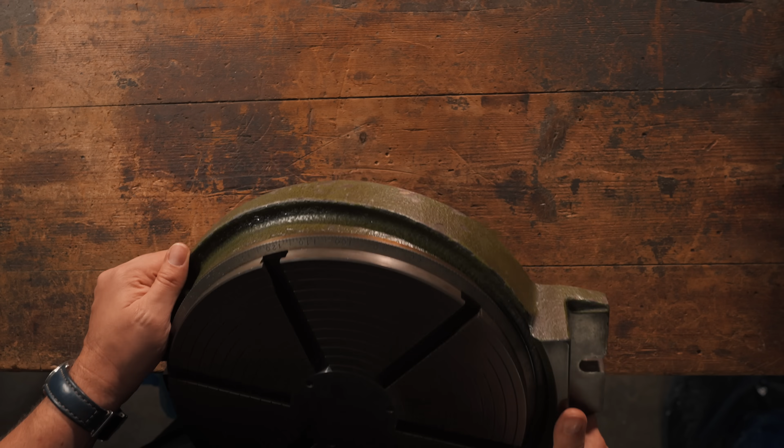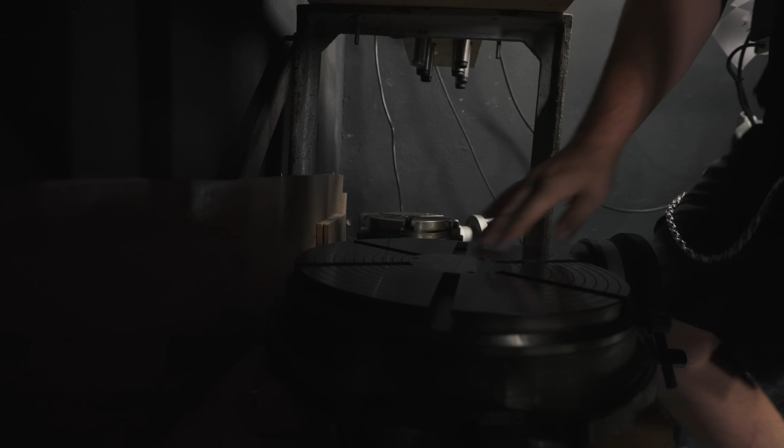This rotary table made its way from a scrapyard to my garage about 8 years ago. I cleaned it, fed it, gave it a nice home on a shelf, and I never used it once because I didn't have any convenient way to hold stuff on the damn thing.

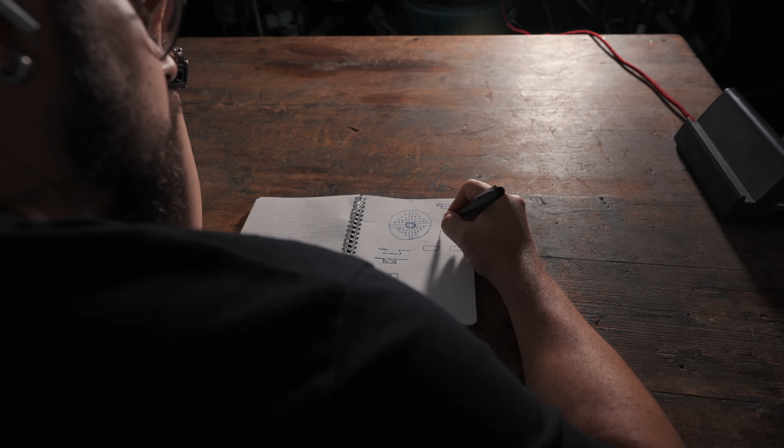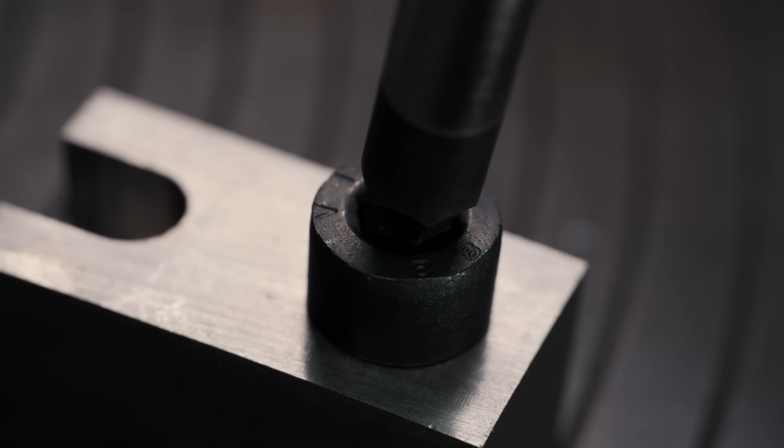Ideally, I would have made a fancy universal fixturing plate, but I didn't and still don't have the resources to make one of those. However, I came up with something a bit more specialized but miles cheaper to make, miles easier to make, and in a way more adaptable than a fixturing plate. I like to call it locating clamp.

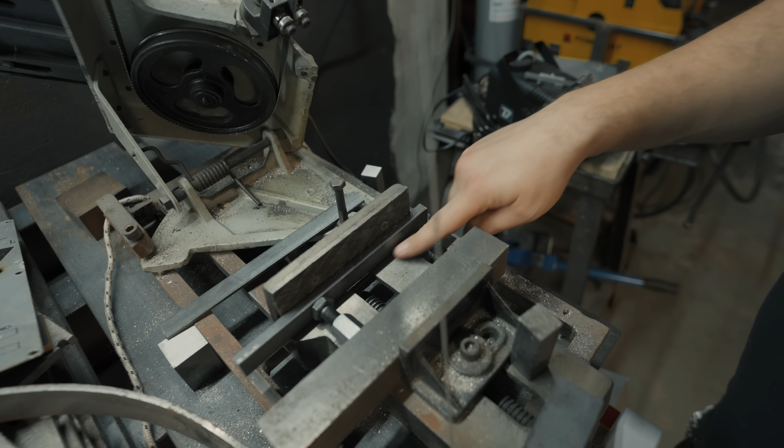It all starts with 4 mild steel blanks like this. Well, almost. This guy here has some extra weight to shave off first. I could thin it down directly on the milling machine, but the bandsaw is faster, works by itself, doesn't dull end mills, and at the end you're left with some usable material instead of a bunch of sharp chips.

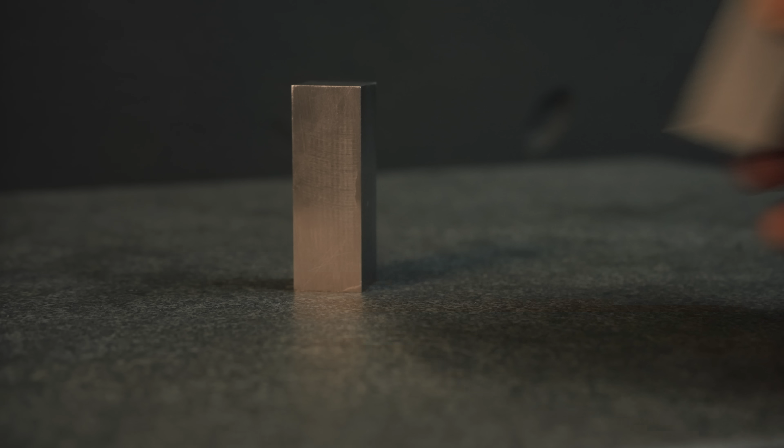Next, I'm squaring the stock and making all 4 blocks the same size, which is the most trivial thing to do in machining, but it's like foreplay. If you don't put enough care and joy into it, all subsequent operations are seriously at risk. For example, I learned to enjoy prepping the stock because I get a kick out of aligning all the squared and sized blocks on the surface plate and feel a continuous surface all the way across. But enough with the intimacy, let's build this thing.

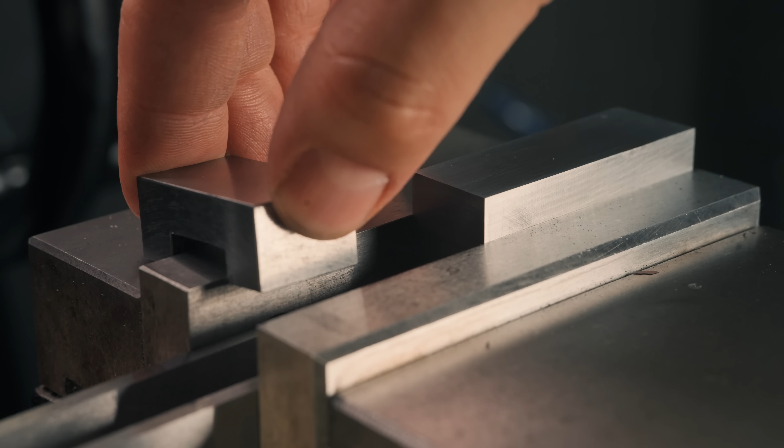To start, I'll secure a wide stop on the front jaw. This little thing will be my best friend for the whole project because I can just set all my references on one block and quickly repeat the setup across all 4, swapping blocks in and out of the vise in the exact same position every time. Huge time saver. Now we just need to put a few round holes in this square peg.

The first one is a reamed 6mm hole to hold the locating pin. The next one is an M6 for clamping the located part, which I'm too much of a pussy to power tap all the way through, and the other is an 8mm hole for the M8 screw that will hold the clamp in place on the rotary table.

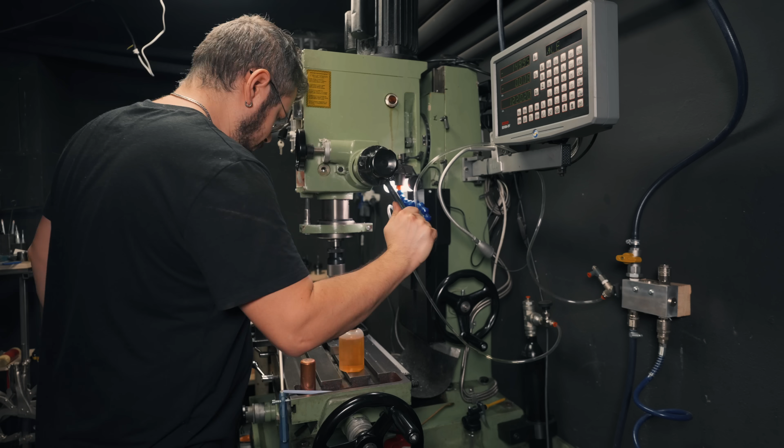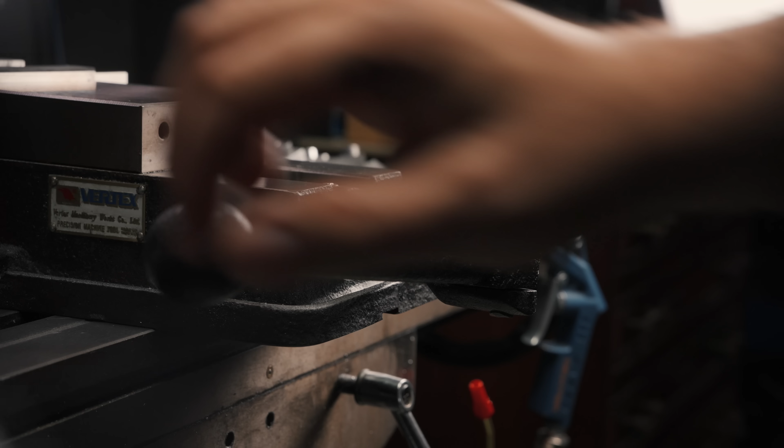After repeating the drill on the other 3 parts, it's time to work on more interesting features, namely the recess for the integrated clamp and the step that gives the parts clearance from the rotary table's table. The recess is an 8mm slot, 10mm deep. Tolerances aren't critical here, so I could just use an 8mm end mill, ignore the fact that the conventional cutting action on this side of the cutter will pull into the material slightly more than its 8mm diameter, and peacefully live with a slightly oversized slot.

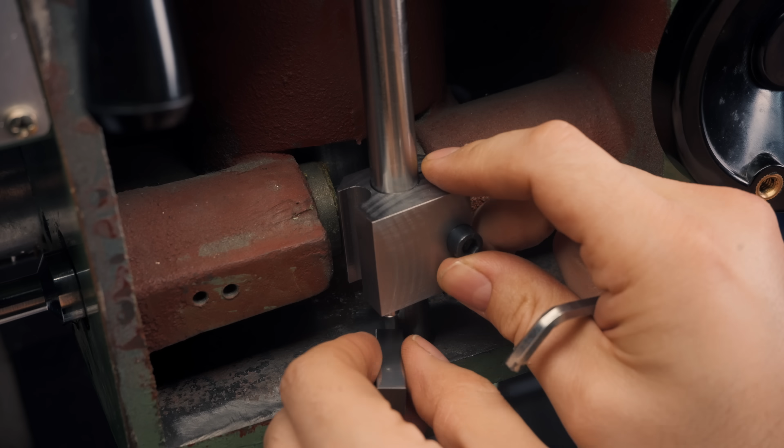Instead, I start with a 7mm drilled hole and plunge with an 8mm end mill. Then I use the same end mill to open up the front and switch to a 6mm end mill to cut the actual slot exactly 8mm wide. The goal here is to make it as precise as possible for no other reason than when it comes time to actually keep tight tolerances, I'll be ready, or at least proficient enough to know what I did wrong.

Next is the clearance step that hopefully will allow me to mill and drill through the held parts without plowing the rotary table. Since it's just a prototype, I've designed these parts to be milled from mild steel in one setup. If it works well, I'd like the clamping surfaces to be hardened, something I can't do on my own yet.

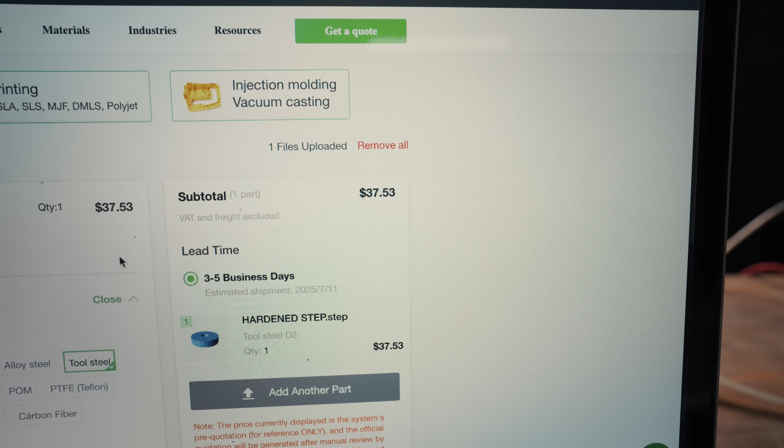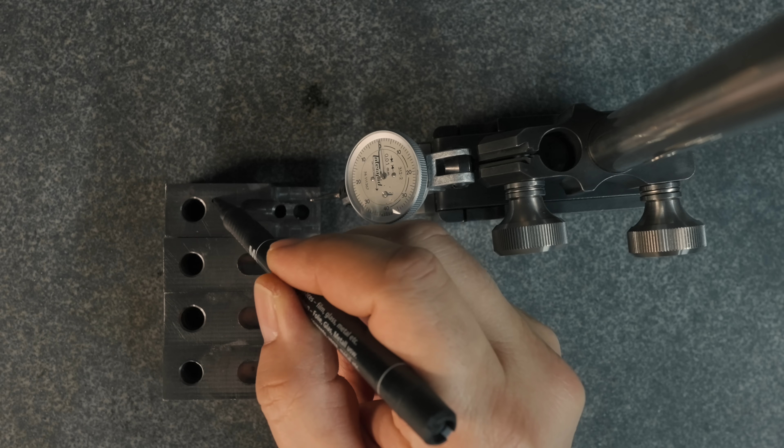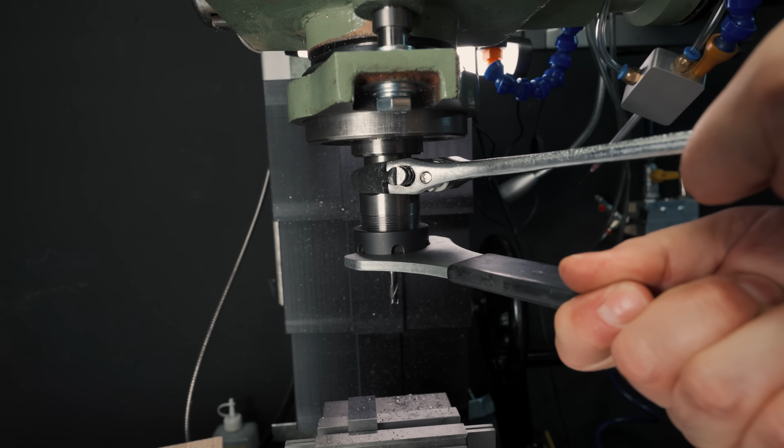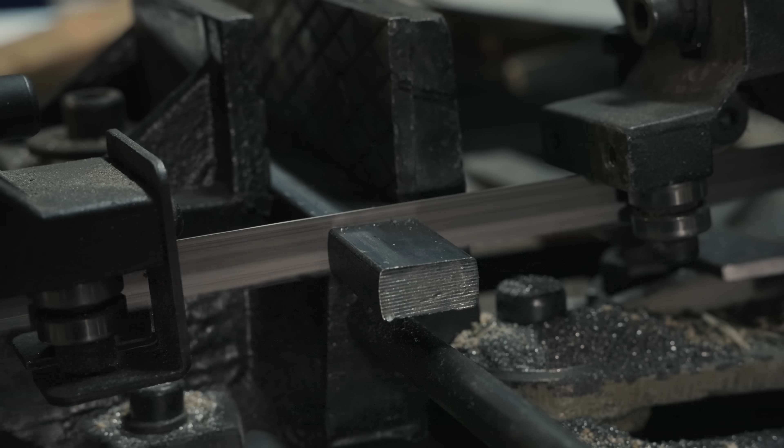Well, I guess I'll just have to surrender to the fact that I'll have to buy new end mills every once in a while. Next on the butcher's block are the clamps. This time to square the stock I'm using a trick I picked up from Joe Pieczynski a while back, where you pinch just a bit of material in the vise and work your way around and on the top with an end mill. Then do the other side, and then you can clamp the piece square and parallel and mill it down to size. I don't use this technique very often because I generally like the fly cutter better, but for small pieces like these, it's super fast, convenient and, well, as easy as pie.

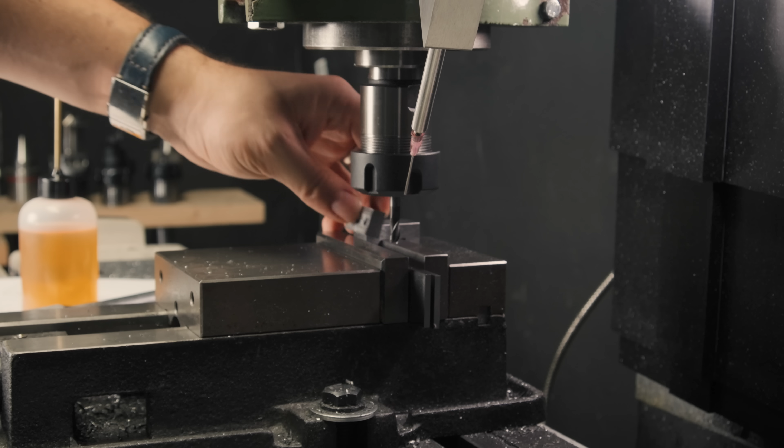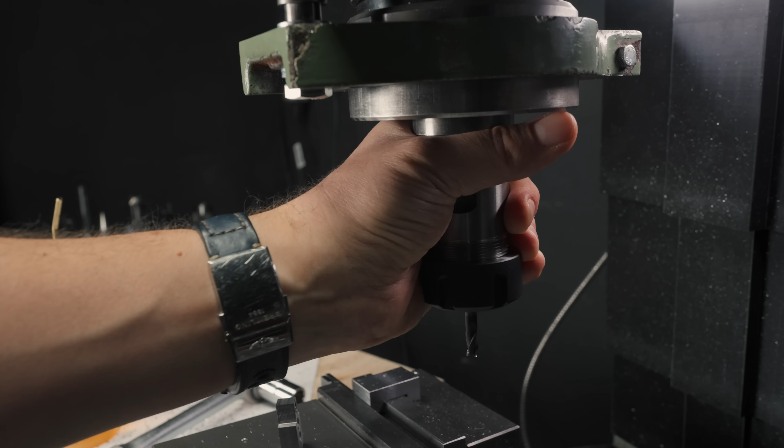These clamps get 3 holes as well, an M6 that this time gets gloriously power tapped, a standard 6mm hole and a reamed 6mm hole. Then I have to cut the mating part that goes into the 8mm slot I was yapping about before, which is nothing to write home about, but to round the end I want to try shaving the corners with my 4mm corner radius cutter on both sides.

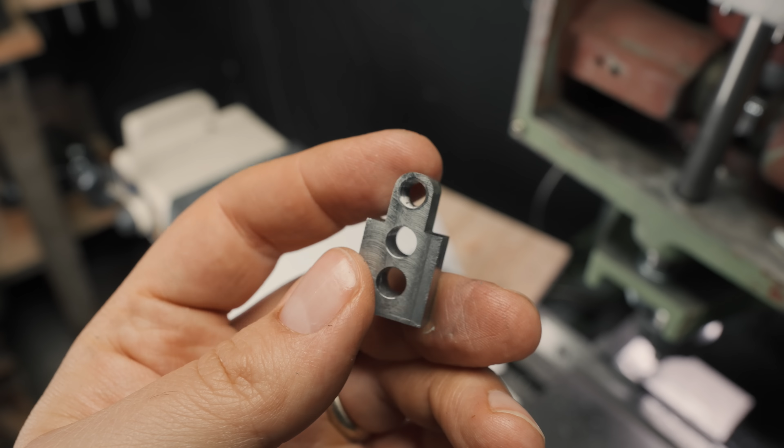To zero the cutter I touch on the top and the sides, pull back a couple of thou, zero the DRO and then send the cutter on its way. It's fast and it's not too bad, just need a bit of sanding. And the fit is pretty nice too.

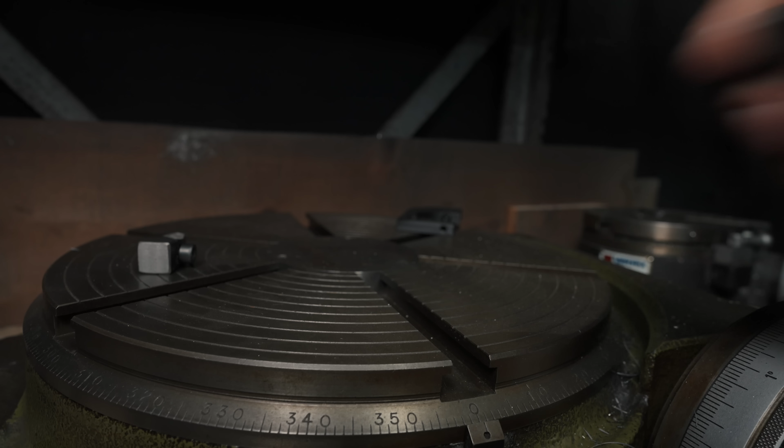Now to finish these parts I'll need the actual rotary table, but there are a couple of things I'll have to do before taking down the vise. The first one is to shorten these nuts I made a while back, so I will be able to use these little handy clamps on this rotary table. And the second is to make a set of nuts dedicated to the locating clamps.

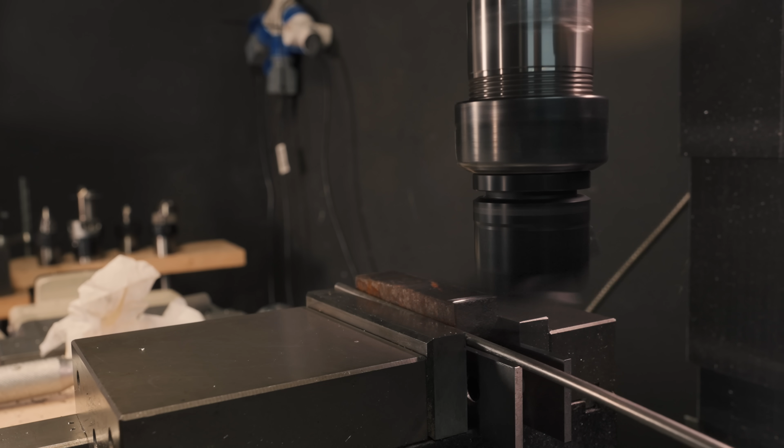Nothing very exciting really, at least until I was about to crash the slitting saw arbor into the vise top. An important reminder to stay focused on the activity at hand when you film yourself doing stuff alone in the garage. In my defense though, that oil gliding on the blade was pretty trippy to watch.

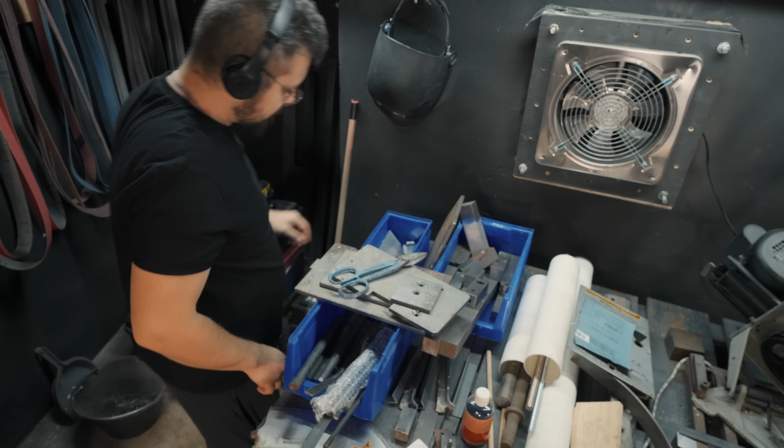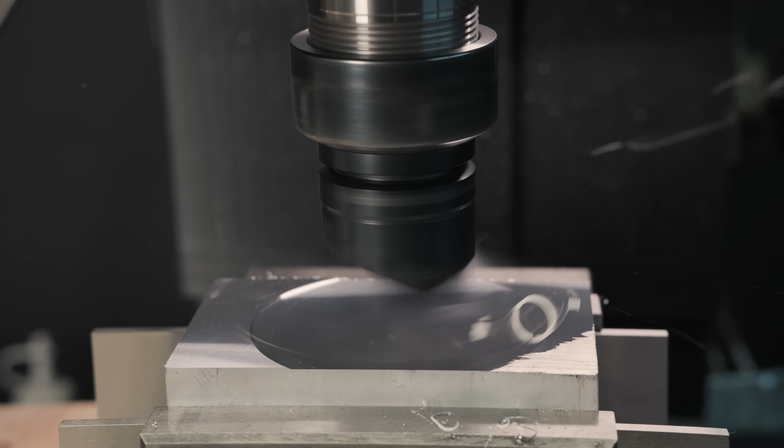And one last thing, we need some kind of fixture to center the parts on the rotary table and take care of these rounds. I'm not a big fan of making one-off fixtures, but in this case I have no choice. It's just a plate with a 6mm reamed hole to hold the 6mm pin and locate the part, and that lower section to clamp it on the rotary table itself.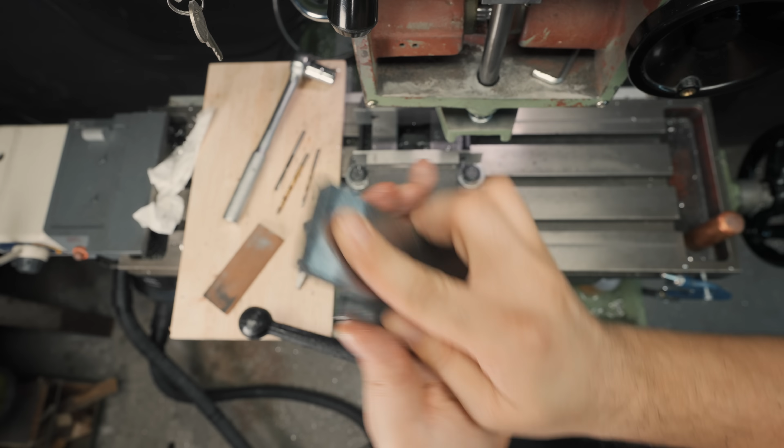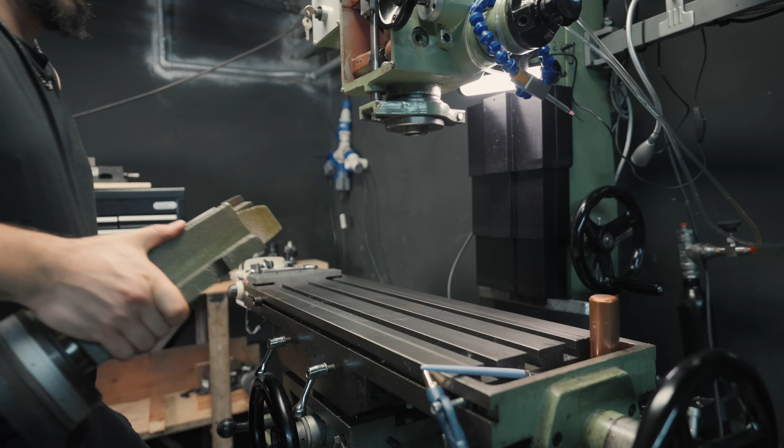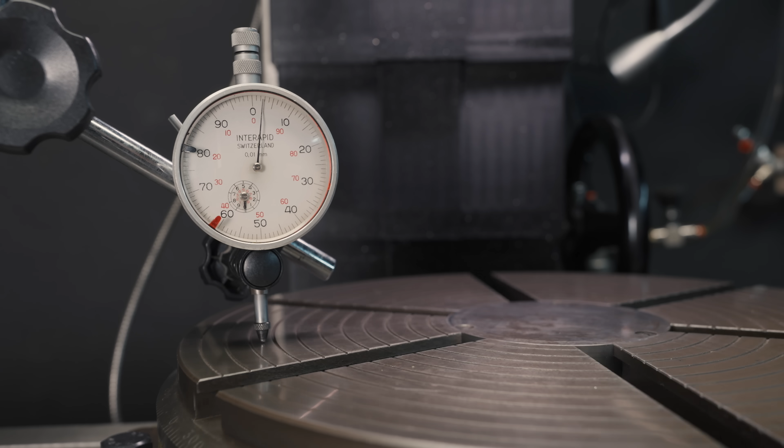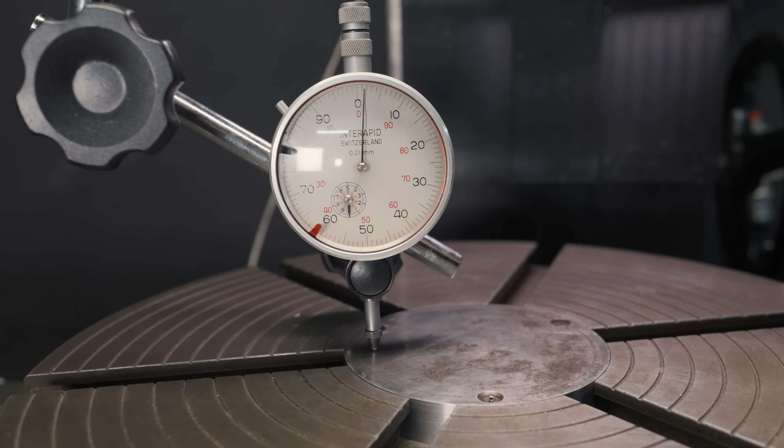Now I can take down the vise and finally mount this rotary table on the milling machine for the very first time. In fact, I don't even know if this thing runs straight, and my first impression isn't fantastic, but I believe a poor cleaning job and questionable assembly could be blamed for this amount of deviation, so for the moment we'll ignore the fact that I was responsible for both those operations and just adjust the center of the table to run slightly less out of whack. With that out of the way, we can finally indicate the table on the milling machine.

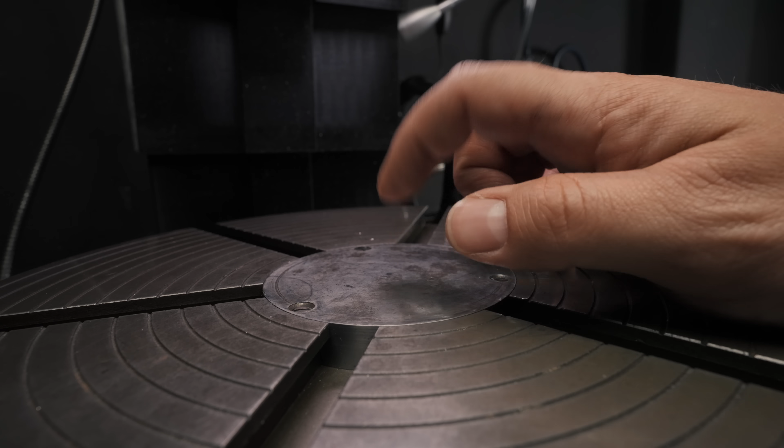So, first I want to align the vertical axis of the rotary table parallel to the y-axis of the milling machine. Now we can finally indicate the table to the spindle. I could take out this plug and indicate around the central bore, but sweeping inside holes I know nothing about isn't really my thing.

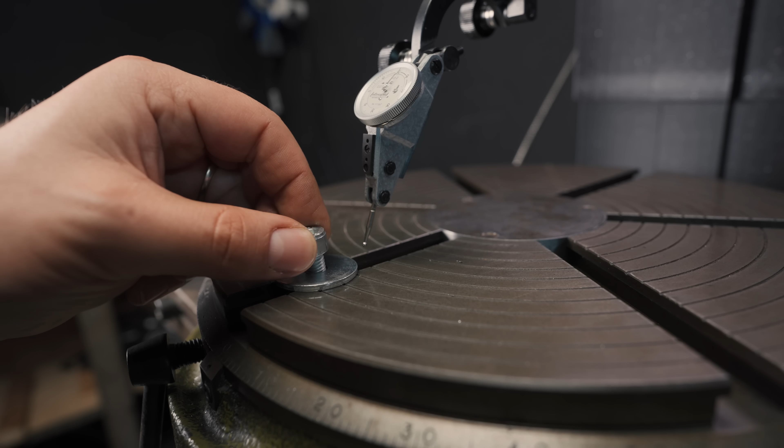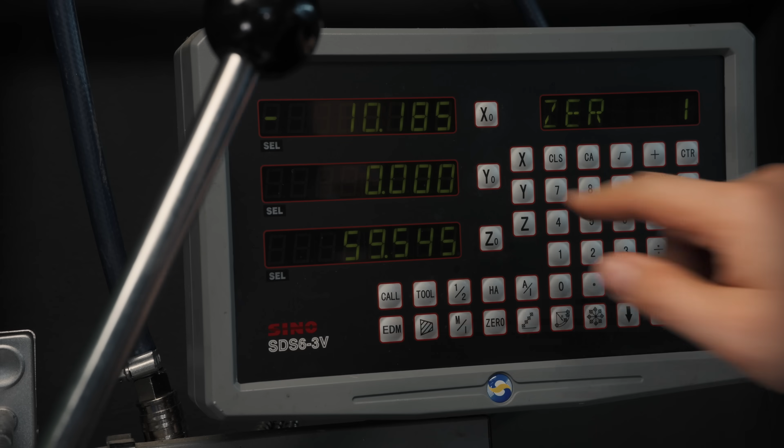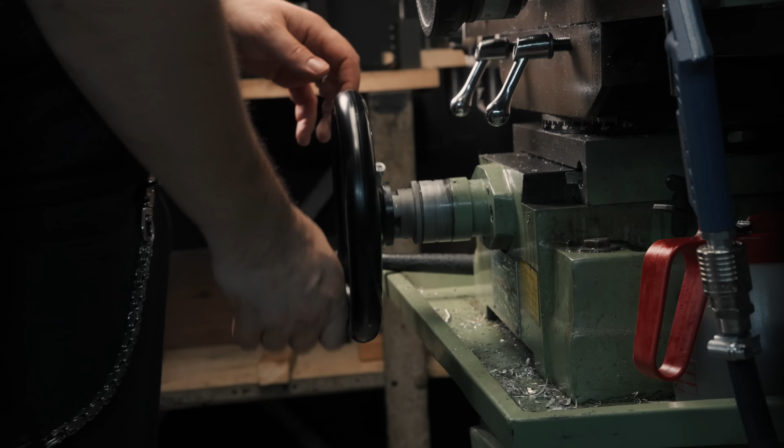I want to use a technique that, like most of what I know about machining, comes from Stefan Gotteswinter. He calls it single point indicator and start with a cylindrical reference, which luckily doesn't have to be a perfect round. Then you look for the high spot at 0 degrees, set the indicator to 0, set the DRO to 0, and then look for the high spot at 180 degrees. Bring the indicator to 0 with the y-axis, and you get an arbitrary number on the DRO. Divide it by 2, and when you crank to 0, you're very close to the center on the y-axis.

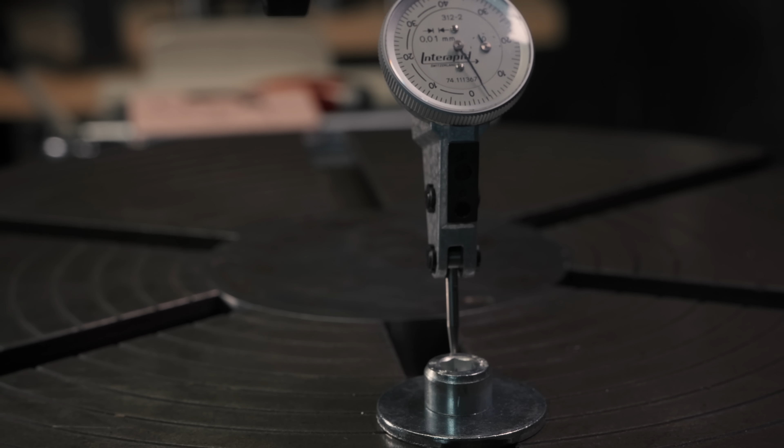Then I repeat the operation on the x-axis at 90 and 270 degrees, and with another round of finessing I get zeros all around. The big advantage of this method is that you indicate the actual center of rotation of the table, regardless of the fact that the central bore could be slightly out of center or out of round.

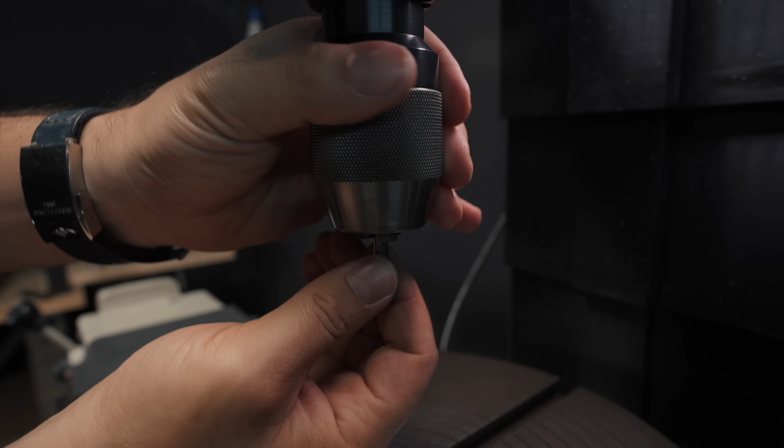Let's finally use this thing. I center the fixture using a pin, and I line it up against a square in a 1-2-3 block. It's not exactly precision, but it's good enough for the task at hand. Little handy clamps, and after aligning and clamping the piece, I can finally bring this rotary table out for a spin.

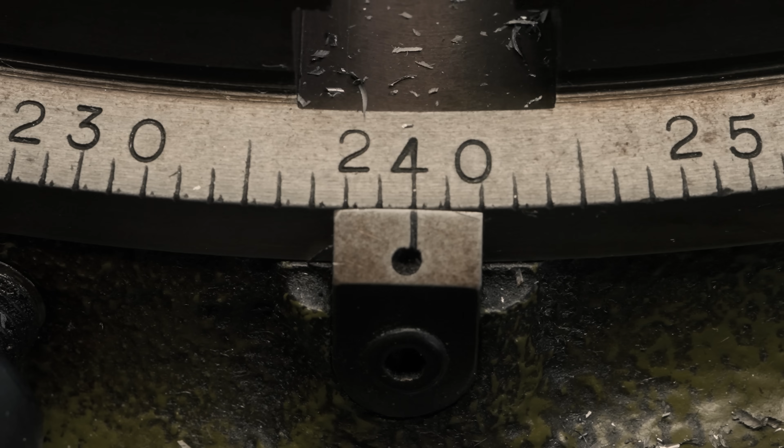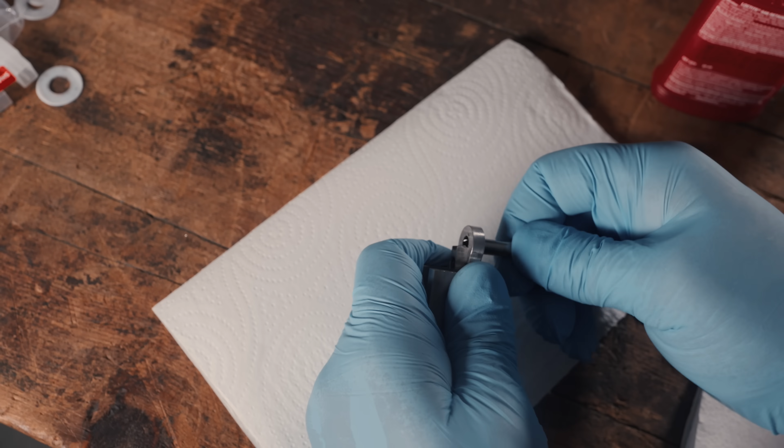I start slow, as you always should, and aside for a bit of stiffness that will require a complete teardown I don't currently have the time for, the thing ain't too shabby for being straight out of the trash bin. Once all the clamp bases are ready, I arm them up with a locating pin each, kept in position by some almighty Loctite 648. The clampy bits are narrower than the fixture edge, so I used some gauge blocks to level them for alignment.

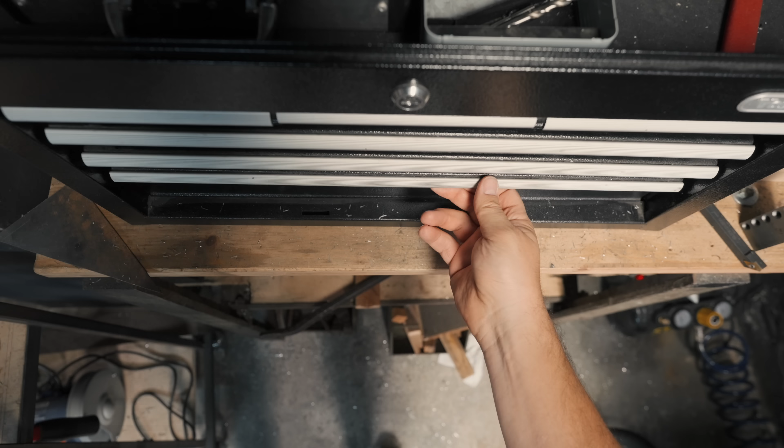And now we're almost there. I just need a set screw to set the clamping thickness and a clamping screw. By the way, I have no idea if something like this already exists. It probably does if it's a good idea. So I think it's time to finally find out if it works using this parallel.

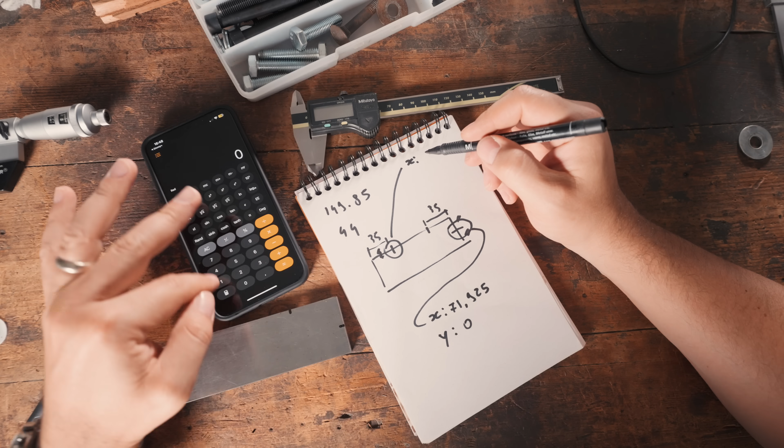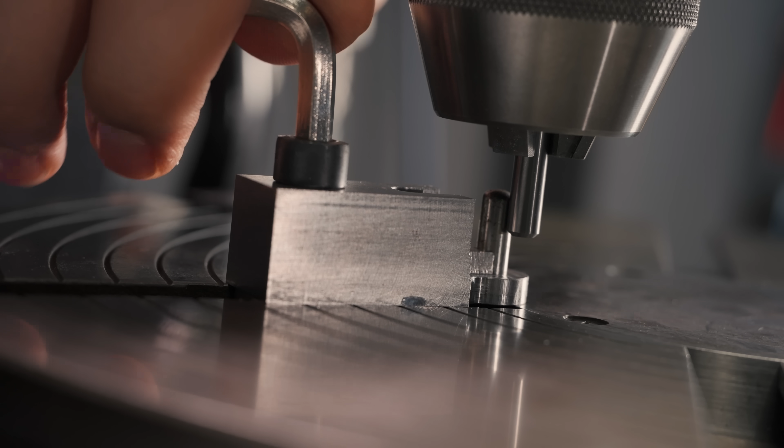Once I determine the coordinates to center the parallel, I should be able to place it on the rotary table using the DRO and the clamps within at least 1 thou from the actual center of the table. Off camera, I made this from a broken end mill, and by setting it in the right coordinate, I can position the clamp against it where it belongs. My only doubt is the level of precision I'll be able to achieve just by eyeballing it.

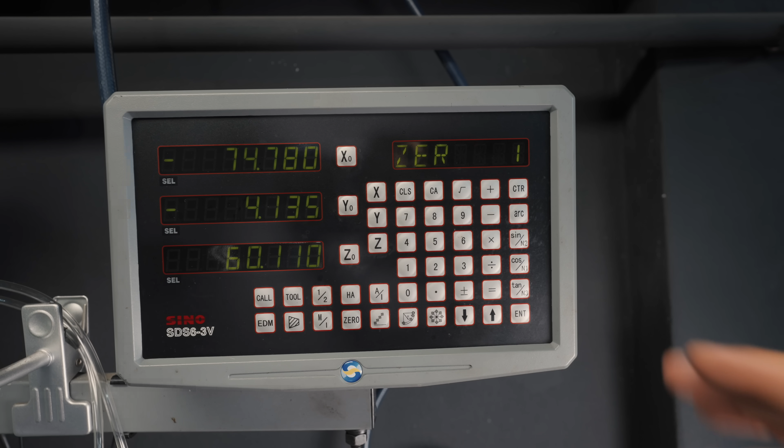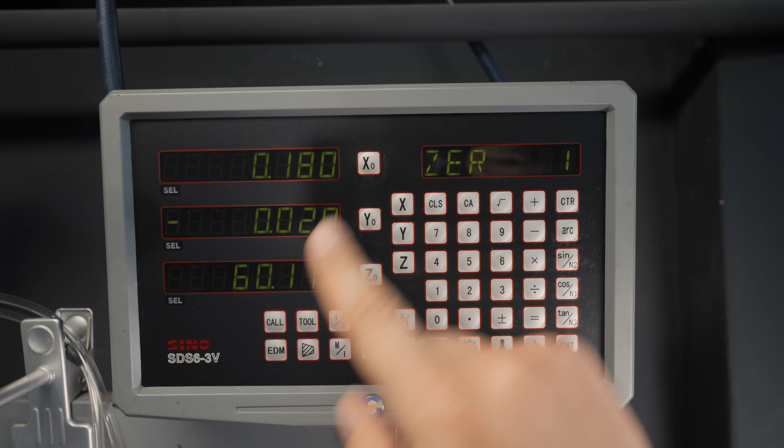So I repeat the operation for 3 clamps and use the 4th to lock it in. Then I lock it down and it's very secure, with a nice clearance from the table. But is it centered? Well, I got the rotary table center on 1, so I switch on 2 and center on the parallel with the edge finder. So when I switch back on 1, we will be able to see the difference, and well, it's very on point on Y, but totally off on X. So much for eyeballing, huh?

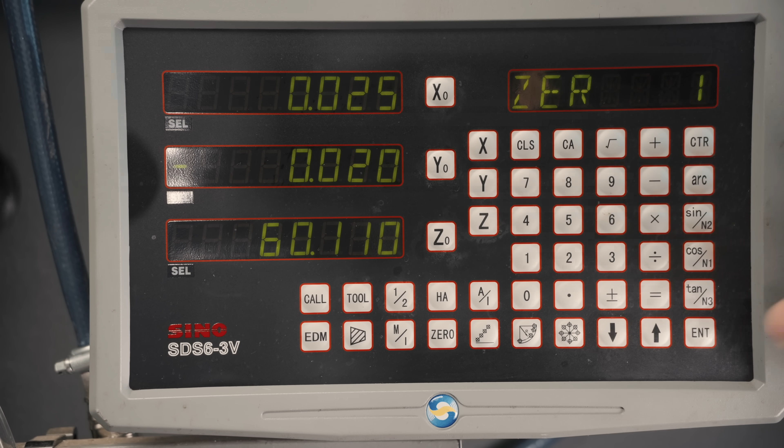But I wonder if the edge finder could be a better aid in placing the pins in the right spot. And yes! They work. These puppies work. There is still work to do.

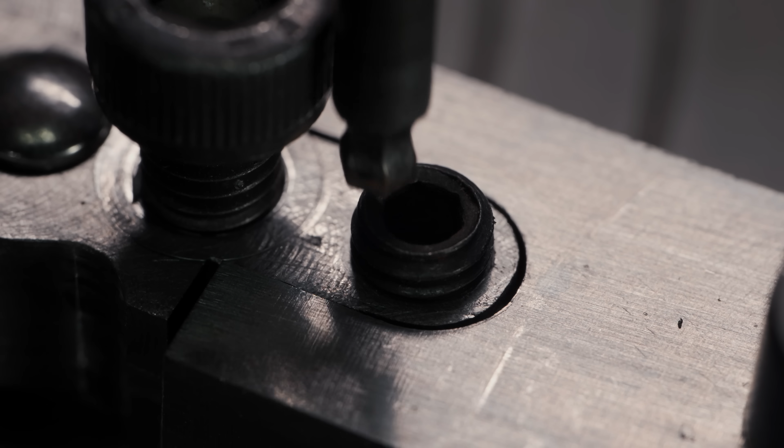For instance, I'd like to find a reliable way to set them in position using an indicator and remove all the guessing work. Because if I can do that, I can calculate and position any kind of shape I want, which for the one-off hobby work I do, it's actually better than a regular fixturing plate. And I'd like to make more to hold different kind of stocks rather than just plates. The rotary table itself also needs some care to remove the deviation and the stiffness, but I'll be eager to have another date with these little things for the next project.